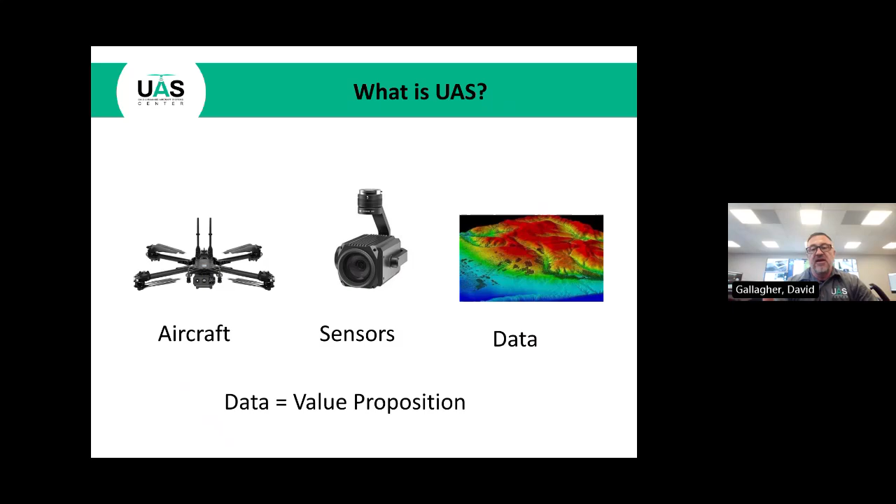We like to refer to these little machines as knowledge delivery machines. So it gives the end user some information in the air using specific sensors to make a decision, whether it's about a crack in the bridge, whether it's a survey mission, whether it's a design project. These are knowledge delivery machines. I can't say that enough.

So there was a bolt on top of this spire that sheared off and it hit some glass panels when it was falling. Luckily, it didn't hurt anyone, but we were able to use a drone, take it out of the box, have it airborne in a matter of minutes, and inspect the glass panels. And right away, we know that there's no issues with the glass panels. There might have been a little crack here and there, but nothing major. So this was able to prove that instead of sending a human up there to take a look at it, we're able to send a small aircraft and get the information we need so we could give that to the end user.

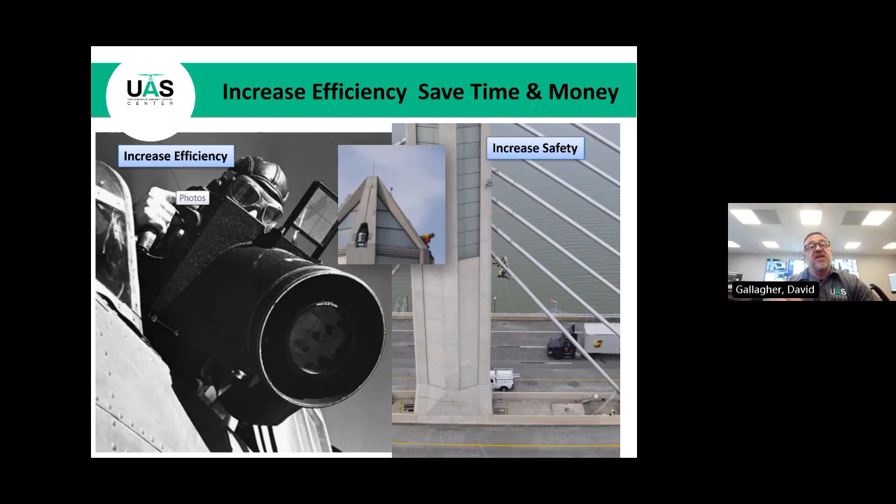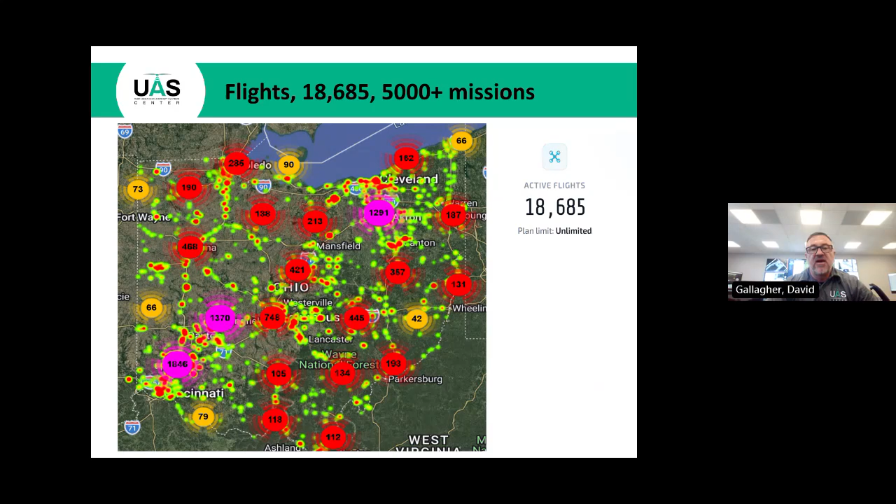So a lot of the stuff we use this for include aerial photography and GIS work. Fancy way of saying mapping. Map builders, map makers make this. So we do interior and exterior inspection. Exterior could be pavement, it could be a bridge. Interior could be inside of a building, inside of a bridge, things of that nature.

This is a construction season, so we're out there all the time doing the progress reports on construction monitoring. We'll talk more about that as we move on. Traffic monitoring is a big one. So these little aircraft can get a bird's eye view of the traffic and what's going on. And I've got examples of this we'll share as well.

So as many of you know, we've had a lot of rain, more rain than we ever had in August, unbelievably. So we've had some natural disasters. We've had a lot of flooding that we've had to respond to. Last Friday, there was an emergency on I-70, and we responded to that, and we were able to live stream all of our data. Live stream it to ODOT Incident Management and also Ohio Emergency Management Agency as well. We're all looking at it live in real time as this was happening.

We also use it for a lot of communications and promotional videos at ODOT. So if anyone ever watches ODOT's Loop every week, a lot of drone footage is in there. We have 3 pilots inside our communications office. As I mentioned before, we have 52 pilots and growing. So 3 of those folks sit in our communications office. So if you're watching the Loop, you know why and where all those drone videos are coming from.

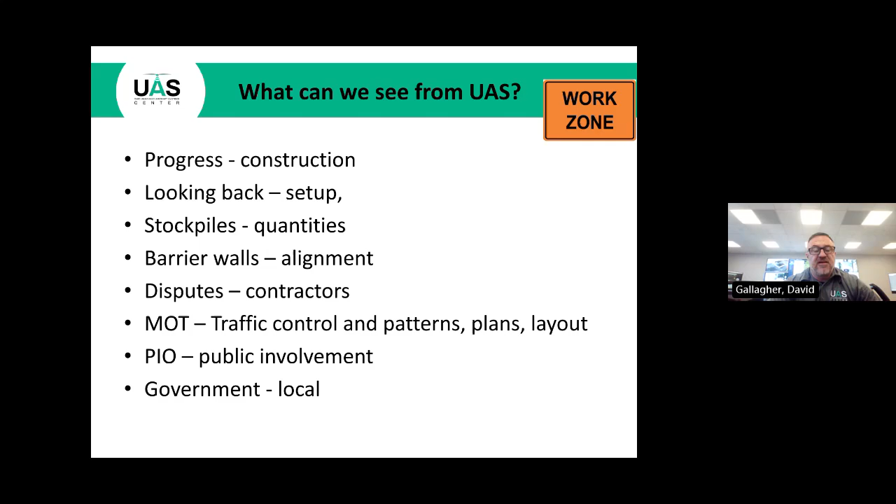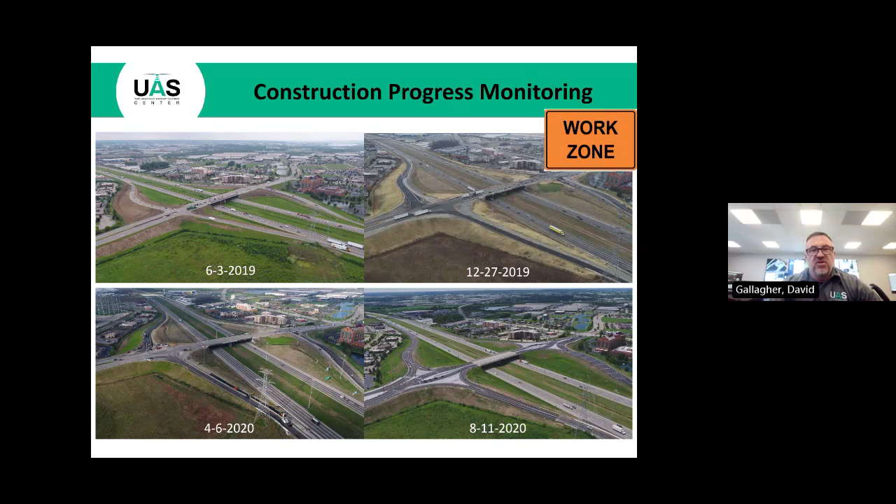Another one we do here at Ohio, and this will lead into bridge inspection as well, but we'll talk about bridge construction. So Ohio, I believe it's the second most bridges in any state in the United States, second to California, and maybe it's third. I think Texas might be third, but we're definitely in the top three here. So 44 some thousand bridges, always building new bridges. We're surrounded by water with Lake Erie to the north and the Ohio River on the southern part of the state. So there's a lot of rivers and streams, creeks and estuaries and watersheds that run through our state.

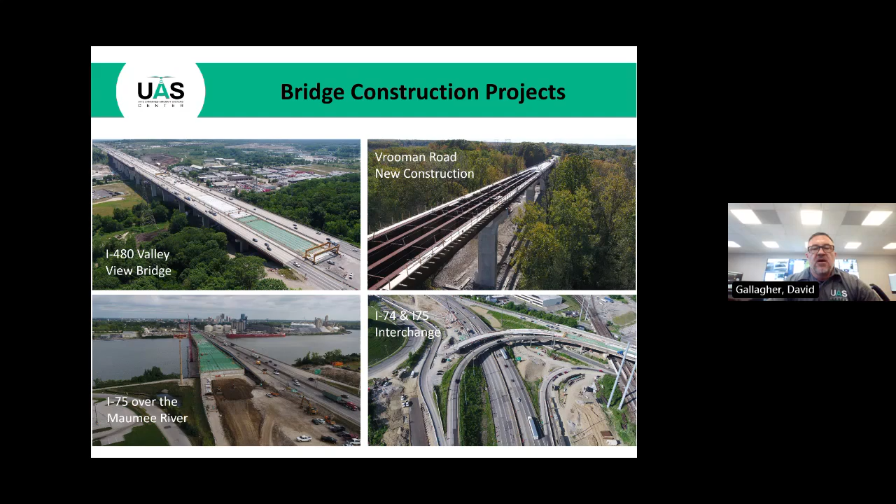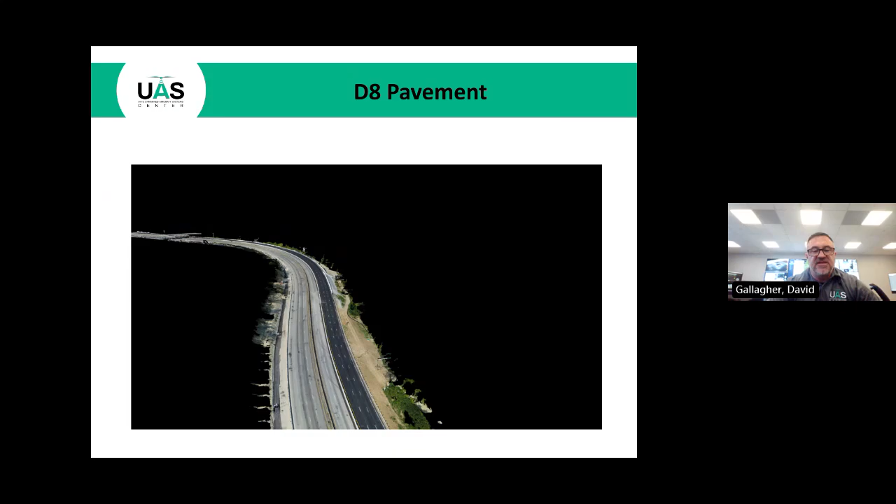So pavement's another one. I'm showing this one here because it shows an example of 3D mapping and stitching. This is hundreds, if not thousands, of pictures stitched together with the right software and the right individual looking at this. You can move this around to look at really detailed pavement markings and new pavement going in there. So for the right type of individual looking to view this, this works really well in the construction process and pavement laying.

And to avoid that, we can use a drone. Sometimes you can't use a drone, sometimes you can, but when you can, it reduces the amount of personnel you need. So it's cheaper for the state because you don't need to use the traffic control to do that. And you can use 1 to 2 folks instead of using 6 to 10 when you're using snooper trucks such as that.

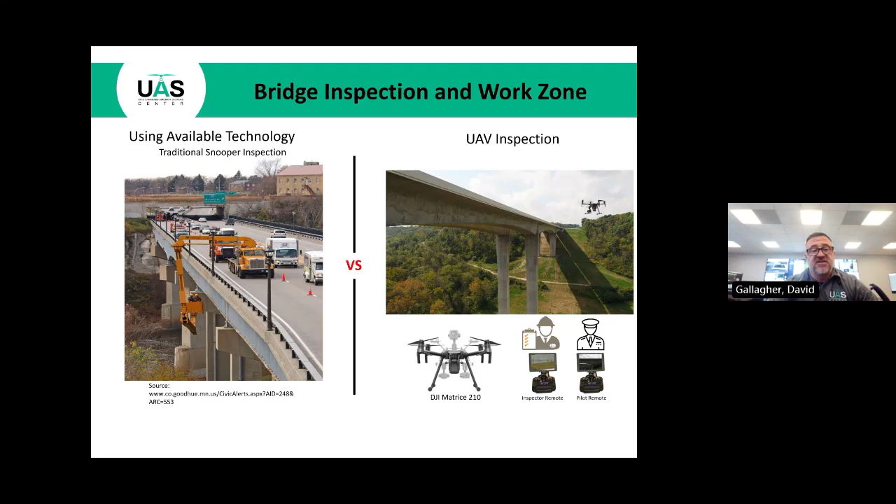So some of the stuff we look at with bridge inspection is scour assessment, the footing detail, cracking. How do the piers look? Are they intact? Is there cracking going on there? We also use thermal technology to look at delamination on top of a bridge deck. We can see cracks and surfaces, particularly on cool mornings as it starts to heat up throughout the day.

Water and moisture seep into this crack, so they show up really brightly, so we can detect cracks instead of using sounding, the traditional method, which is dragging chains across the bridge deck and listening to the sounds for defects.

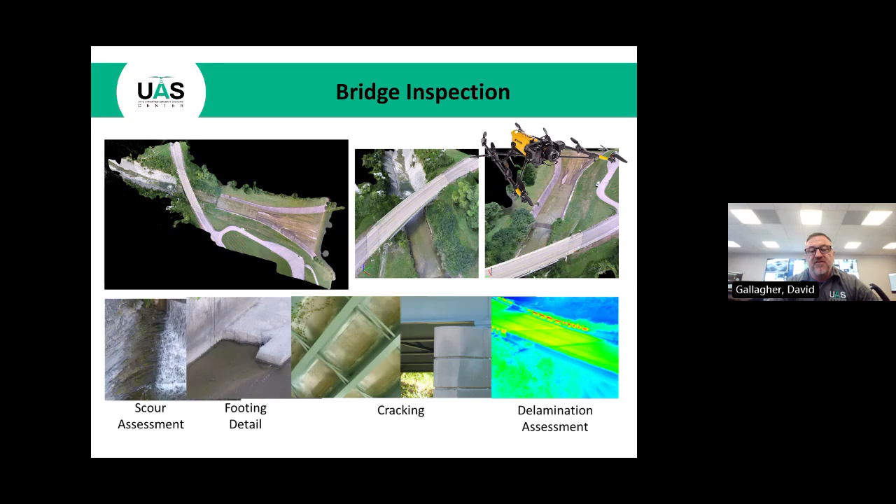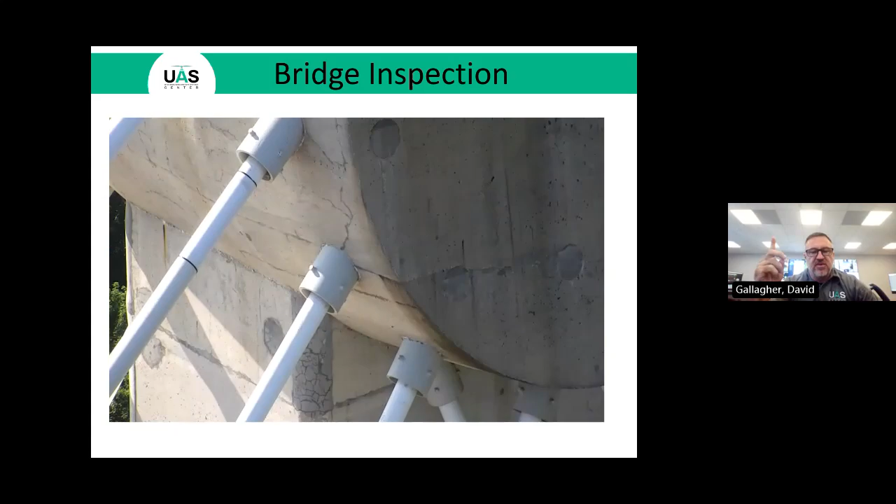So this is a more advanced way of looking at that. So here is a bridge spire at the Ohio River. I want to say this is the Grant Bridge, but traditionally you have to climb up a ladder, then rappel out a hatch and rappel down to this spot here. So this is a previously repaired area. You can see the mortar is still holding in there very well. So that bridge is good. We don't have to look at that crack.

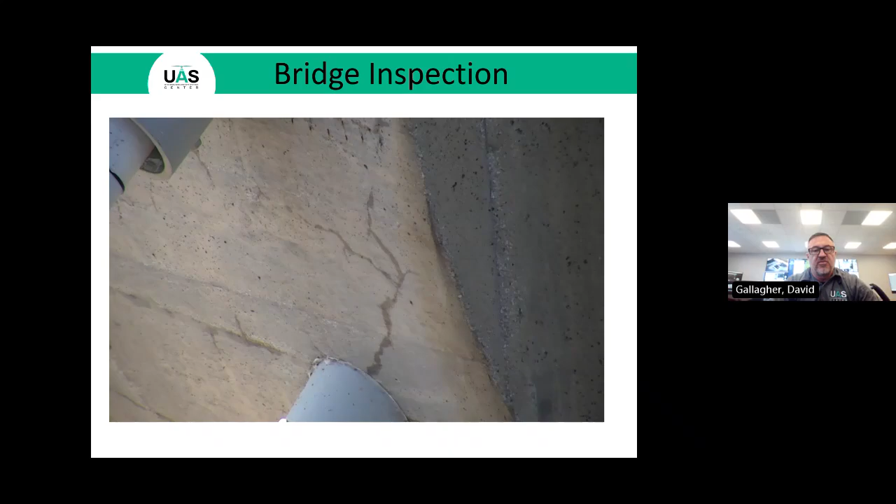And again, it took a matter of minutes to bring that aircraft out of its box and get it airborne and take a look at what's going on this bridge. So we can use this technology on all of our bridges. So here's a culvert, it's another one. So these run underneath bridges typically.

We're flying a drone with a spotlight camera on it. So you can see it illuminates very well in here. If we were to switch that light off, it would be completely dark in there, and you just see a light at the end of the tunnel. So it's just an aircraft. We also have a robotic dog that goes into these as well. We can talk more about that as well.

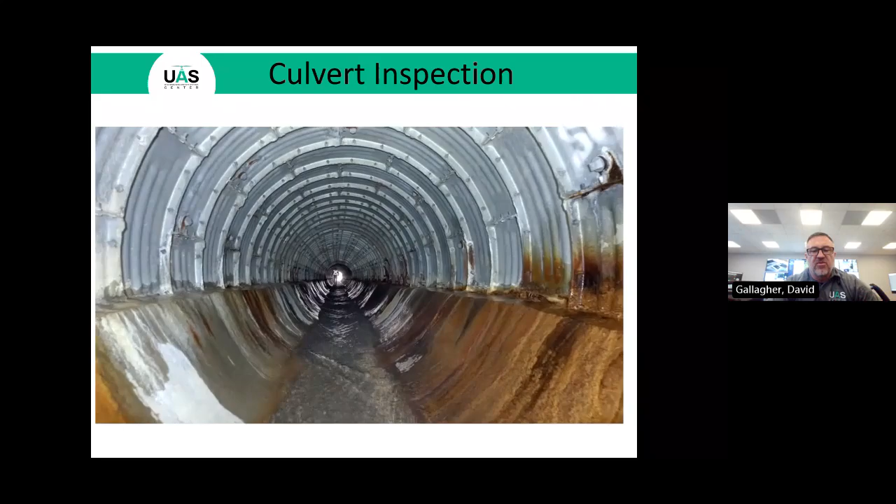Also, we use it for traffic control. We use it to use existing bridges such as the Big Mac Bridge down there in Cincinnati to move traffic around the city so we could do our best to reduce congestion in this area. We also responded to the Big Mac fire that happened a couple years ago as well. So it seems like a lot of activity down in Cincinnati, and drones help assess what's going on.

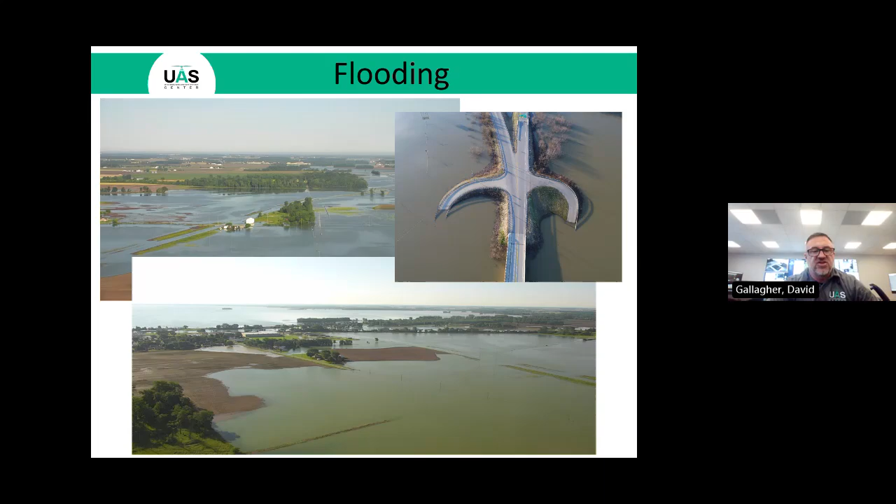So flooding's another issue we already talked about. So when water gets on a road, we have to be ready to respond to that and get those freeways up and running. So it could be something as far as drainage. Maybe there's a new culvert that needs to be put in there, drainage tiles you need to put in, things of that nature.

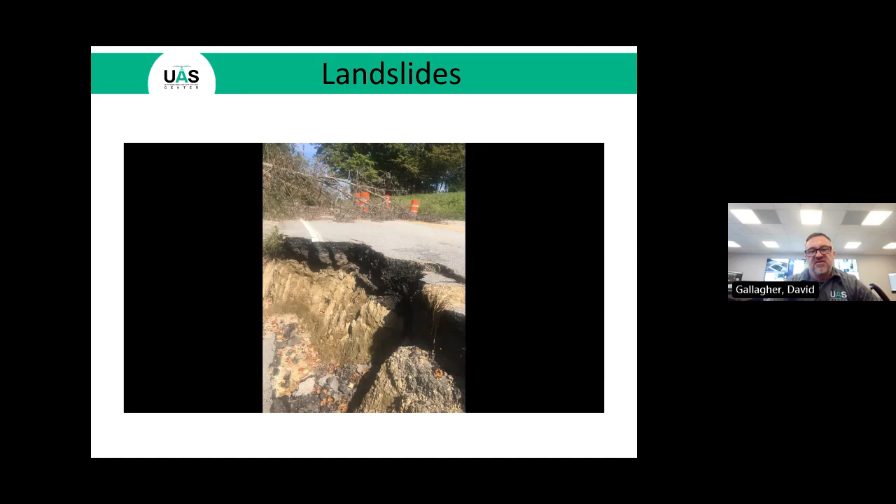Weather also causes this phenomenon, mudslides. You can see it actually slipping here. This was District 11 on the eastern side of the state in Ohio. You can actually see one of our road crew and our drone operator scurrying away. So here's some more washouts you see here. You can actually see what it does to it. Rock falls are another one that I don't have a slide for, but rock falls we have a lot of those too associated with the weather.

And we can stream this real time to our traffic folks so they can actually change these light signals from a computer at their office. So this is very valuable for our traffic folks when they're dealing with a congestion issue. And if there's a simple fix like the lights not being timed properly, we can fix that almost immediately. So a lot of benefits for traffic monitoring.

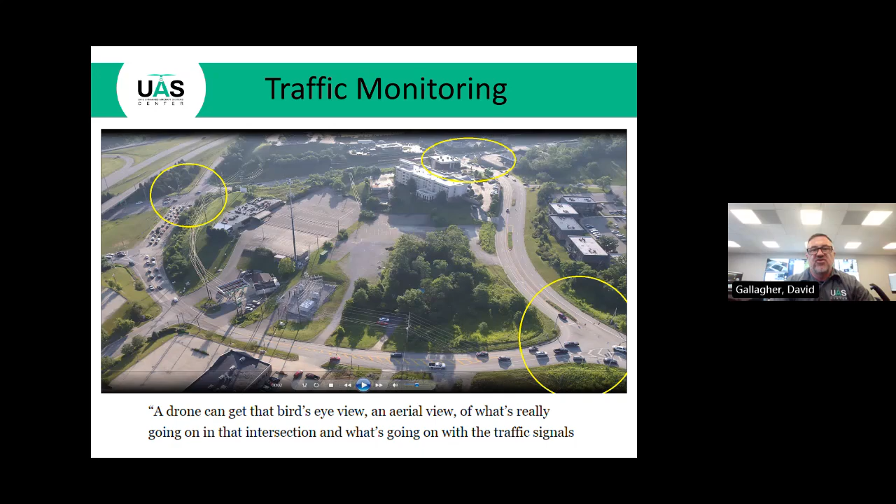So another one we do, I just got a request yesterday for school zones. So if they have a new traffic light, a new means of moving traffic through these school zones, we'll test it out. This particular one was in Springboro, Ohio.

So we had 6 aircraft up at once. Over the course of a half a mile stretch of road, 2-lane road, there's 5 schools. So we put in some new mechanisms. We had law enforcement out there and working with the city of Springboro, we're able to speed up the traffic flow by 25%. Might not sound like a lot to you or me, but for the folks of Springboro, they said this really helped with the congestion in the morning and the late afternoon.

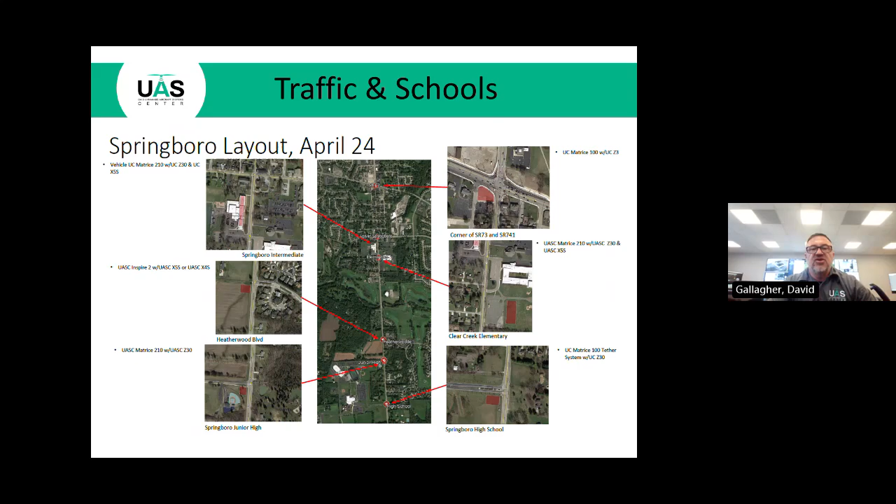So we have the ability to stream all of our drones into the ODOT system, the Milestone system. Everyone knows and loves it at your local TV broadcast through the ODOT cameras. You can see in the upper right, this is the Jeremiah Morrow Bridge. We videoed it when it was being demolished, so we were able to capture that in real time for our folks to have situational awareness so they can make decisions about what's going on in those areas. So again, anywhere in the state of Ohio, we basically have mobile pole cameras that we can put up anywhere in the state as long as we have internet connection.

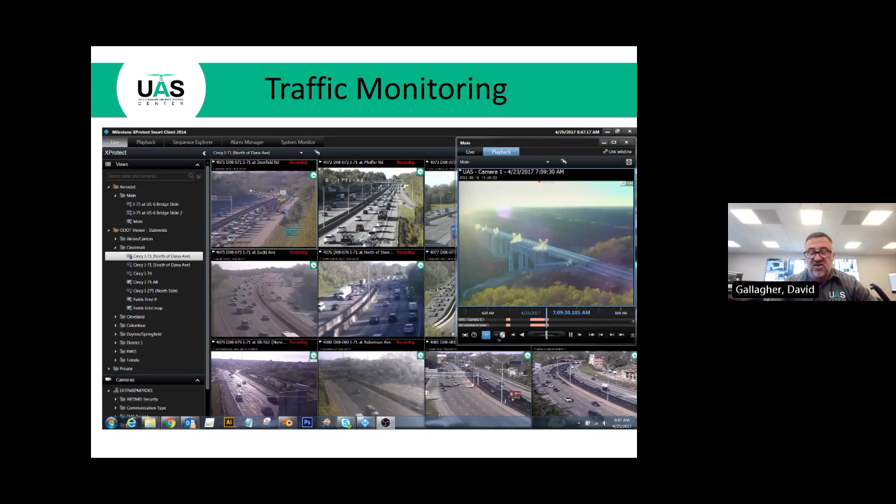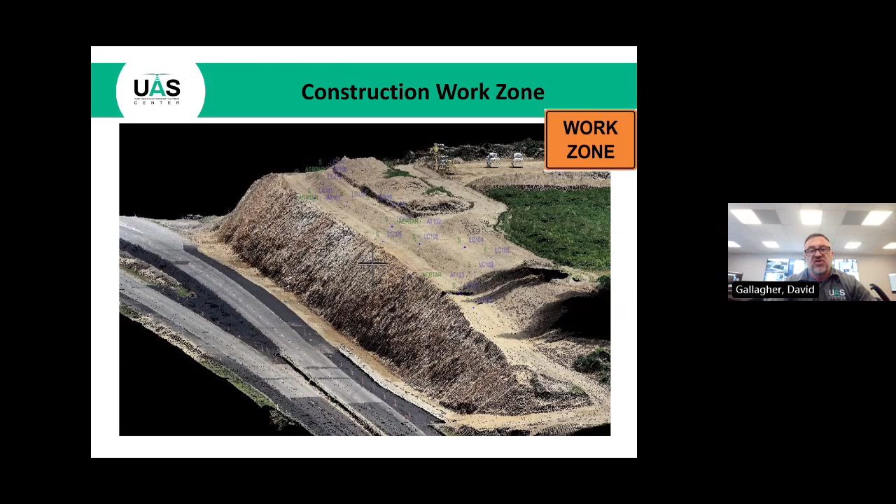So all the stuff I talked about before was pictures and videos, but we actually can use design level work for this design level surveying. So this is a new on and off ramp. In this particular case, we had contractors removing rock face off there. So we're able to get high levels of accuracy for rubble removal. This is important for ODOT because contractors love to charge by the truckload, and the rubble decompacts when it's off the surface. So they are able to get more money and fill up a truck. So we're able to keep them honest a little more and see about the true value of rock and rubble coming off the freeway here.

Another example, this is kind of like using virtual reality at your fingertips. This is a new intersection that's being designed. The old stringer arms, typically we will replace these with the steel mast arms you'll see going up everywhere. But everything in this photo has to be measured. And traditional methods at ODOT of measuring this stuff is using a pole to measure everything.

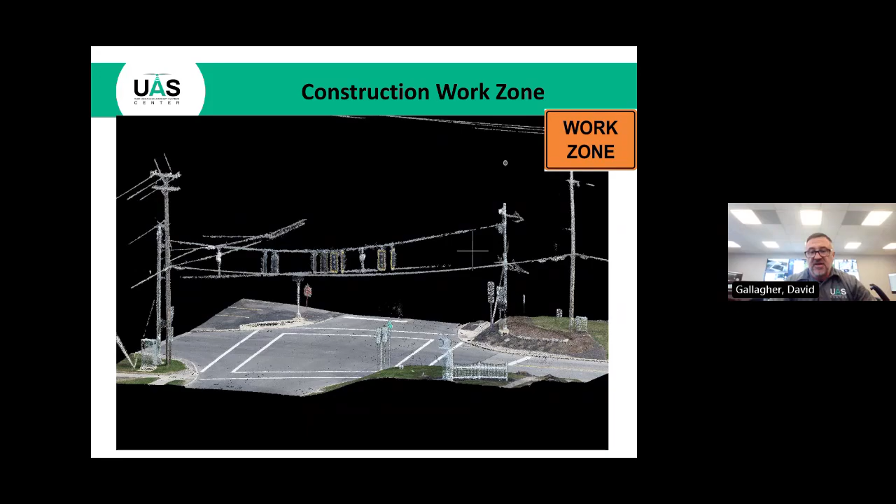Well, we can measure everything by using a 3D map, orthomosaic pictures here, stitch them all together, and we can measure all the telephone lines, the cable lines, the stop signs, the traffic signs, and the signage here for the street lights here. We can measure all that stuff. And design folks love this because they don't have to go out to the site. They can go back to their computer and look at it basically in virtual reality and do all the design work he or she needs to do for this.

So I mentioned some sensors we use. So some of the sensors we use are typical electro-optical, which are just a video camera. We have the thermal camera. I showed you an example of that. We also have a radiation detection module sensor. So we partnered with the Ohio Department of Health. We actually have a decommissioned cobalt site in northern Ohio. We're actually flying tomorrow, working with the Ohio Department of Health, making sure it's cleaned up and there's no radiation emitted from this cleanup site.

Another project we do in the upper right, orphan wells. So in the late 1800s and early 1900s, all the farmers were drilling for oil. This particular picture is at Grand Lake St. Mary's. That was the first offshore drilling of oil anywhere in the world, and that was at Grand Lake St. Mary's. So we use basically what they call a magnetometer. That's a fancy way of saying metal detector.

So what that does is we measure the Earth's magnetic field, and large metal objects will disrupt the magnetic field. So it'll give us a little blip on our screen here, and we know there's an orphan well there. It could be a vehicle, it could be a submerged vehicle. More than likely, it's going to be a wellhead. So we give that information to the Ohio Department of Natural Resources, and they'll either go out there and plug it or contract someone to go plug it up.

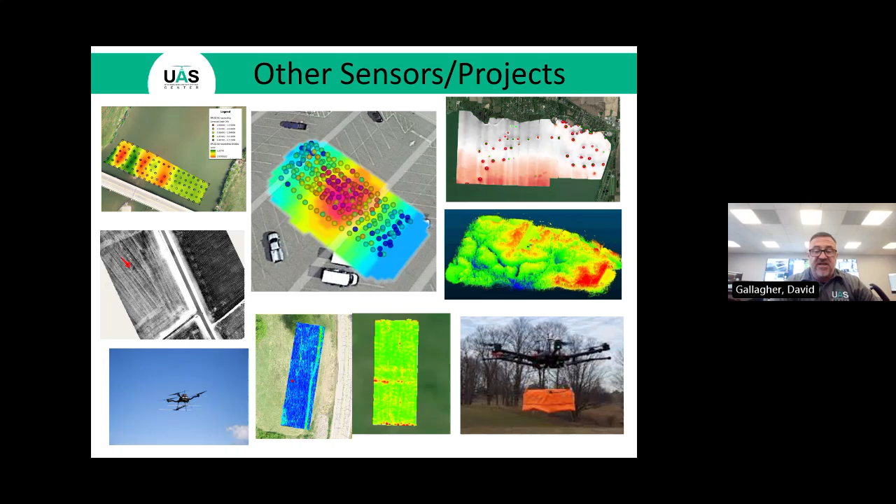We also have an aircraft airborne on the bottom left that has a radio detector. So there's folks that will put a transmitter on a bat, then look to see where it's moving. We can use a drone to look at that. We also have ground penetrating radar that we use. So if we're looking at septic tanks, we're putting in a roundabout. We don't want to hit the septic tank, so we'll look at stuff around a roundabout, looking for drainage tiles and any utilities that might be in the ground that we want to avoid hitting, or at least marking them in case we need to move them.

So we also have fixed wing aircraft. We have beyond visual line of sight. So typically, if you're a Part 107 remote pilot, you have to keep the aircraft within visual line of sight. So we've been at this a while. So we have waivers through the FAA where we can take these aircraft beyond visual line of sight and conduct larger operations. How am I doing on time?

Okay. So we also have these small boats using side scan sonar, and these are working out magnificently for us. So what we're looking at here is a bridge pier. So when a river's flowing in a particular direction, on the opposite side, it causes these scour holes, and they can be some 30 feet deep. So that could compromise the integrity of the bridge pier.

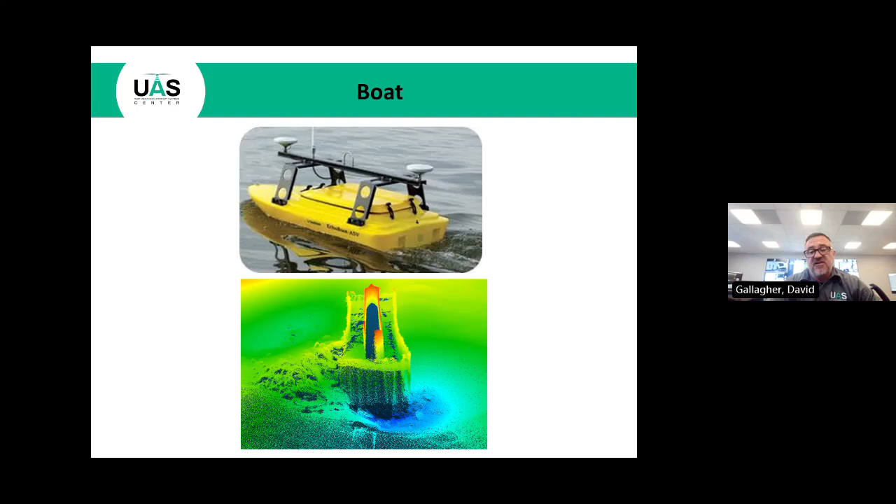So we'll identify these, and ODOT will put large boulders around the pier so it keeps the bridge pier from deteriorating. So we identify a lot of these, and we've seen some holes some 30 feet deep, so they get pretty deep sometimes. So it's important that we find these and seal them all up. Here's just a few examples. Let's see if I have a video here. I don't think the video worked for this one.

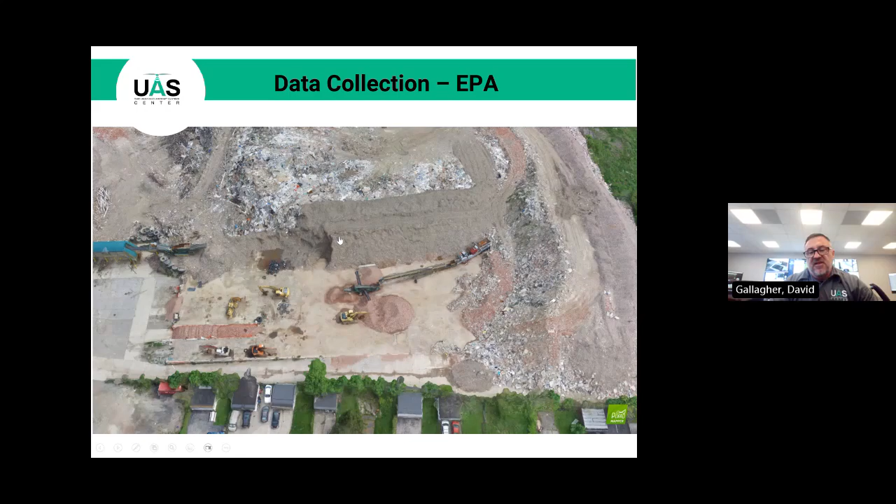But this is an Ohio EPA site here. We're doing volume calculation. This company was in the business of recycling homes, and they went out of business and left this very large pile of rubble here. This was 3 stories tall, so we were able to make a calculation for Ohio EPA. This ultimately ended up costing the state $10 million to clean up, which is unfortunate, but we were able to get the data that they needed to do this project, which is fortunate.

So we have more technology that we're using here called drone in the box. We have 3 of these boxes currently at ODOT. We have 2 of them sitting down at the Brent Spence Bridge, which is Ohio's largest construction project. So we're doing active monitoring of the project pretty much daily here. And down there, Cincinnati Police Department has 22 of the same type of docks they're using to respond. We'll talk more about this because we have a project we're using across the state with first responders.

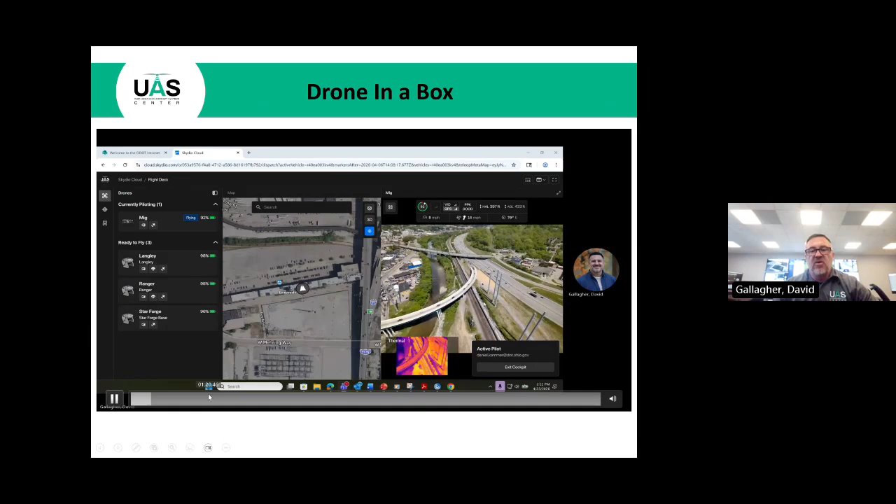And as I mentioned, we've got one of these dock systems. So we first tested this dock system out with Caltrans, our counterpart in California, and we were flying these aircraft from California. And if we have time, I can demonstrate one, but this is at our facility here flying it.

So if I got time, I will do a quick flight for you, but we'll determine that at the end here. So as I mentioned before, we have a project with first responders called the Drone for First Responders program.

So this was created last year under Ohio House Bill 96 to support the use of law enforcement, fire departments, and emergency medical services. The Drone First Responders program utilized the drone in the box solution to reach emergencies before ground units can get there. So a lot of times, if a first responder is going to a scene, they have trouble getting to the site because of traffic issues. If it's an accident or it's a dangerous situation, we can send in these aircraft in a city to look at, see what's going on, so we can send the appropriate medical or first response service to that area.

So this is a statewide program. ODOT was commissioned to do this by the state legislature, as I mentioned. So the objectives are to prep for a statewide first responder drone program, and working with the FAA to create data to see how this is going. So our objectives are to first acquire assets for first responders. These are drone in the box. We had five vendors that the folks were able to choose from, and they're integrating this into the national airspace system, which is important because this is a new technology, and ultimately we want to develop a comprehensive plan for this.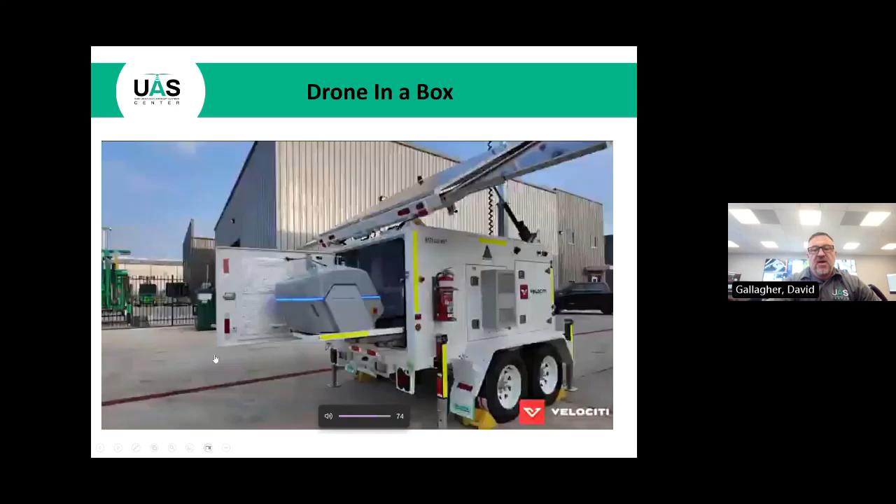And we're actually in the process of acquiring this mobile unit where we can roll it out. It does have a little video sound. Turn that down a little bit. But essentially, this is a drone in a box that's in a trailer that we can respond anywhere in the state. So we can roll up to a construction site and plop that out there and begin our operations. Or for like an Ohio State game, or if there's a natural disaster, we can roll this out at a site instantaneously, and we can power it up and fly it for several days as needed. So everything you saw was the operation side of the house. When I say operation, it's actually deploying these small aircraft and using them to collect data that's useful.

Our other project we're doing here at the UAS center is the Fly Ohio initiative. And this is where we're bringing in folks who are testing air taxis. We have a partnership with the Air Force Research Laboratory and the Air Force at Wright-Patterson Air Force Base. So we have this special radar system that utilizes 3 existing radars. So if you fly out of John Glenn International, Dayton International, there's obviously radar systems there for air traffic control. We're using those feeds along with a long-range security radar system in London, Ohio. So across the United States, it's hard to find 2 radars within 90 miles of each other. We have 3 radars within 60 miles of each other in an area where our test site is flat.